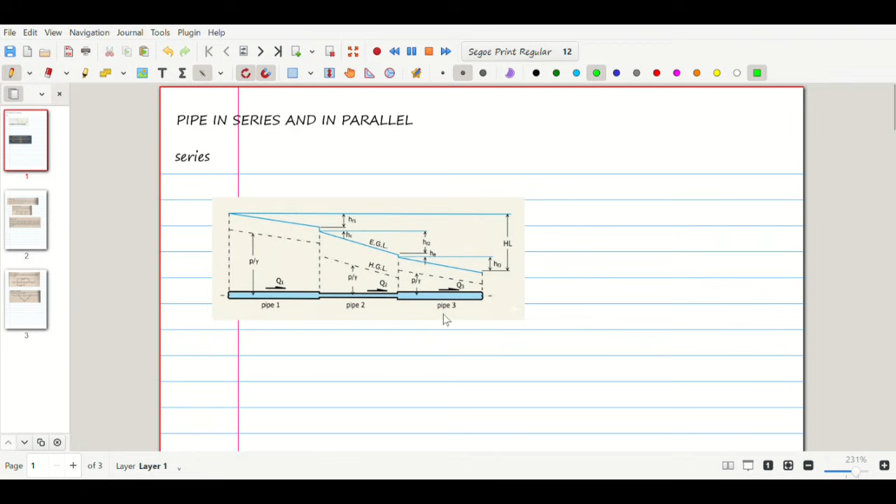What you should notice is, for pipe 1, pipe 2, and pipe 3, is the head loss different? Or is the head loss the same? And also, is the discharge different? Okay, so first notice the discharge.

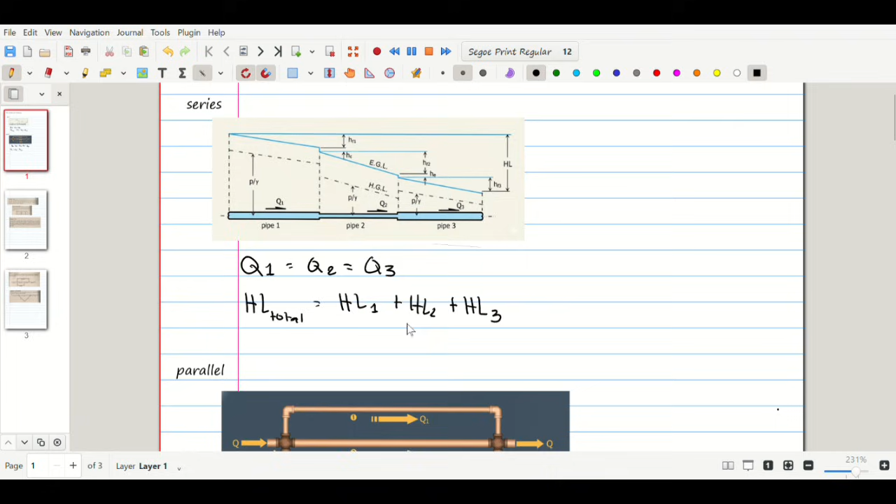So, ang takeaway mo dito, kapag series, the discharge are equal, head loss from starting point papuntang end point is the summation of head losses. Kapag parallel naman, the discharge from A to B is equal. However, yung nasa pipe sa loob, not necessarily equal. And kapag pinagsama mo yon, equal yon sa discharge sa B. And lastly, yung head loss naman, yun naman yung magiging equal.

So, parang baliktad lang yung series and yung pipes in parallel. Okay? So, diniscuss lang natin ngayon yung concepts and we will be continuing with the problems tomorrow. So, ito yan.

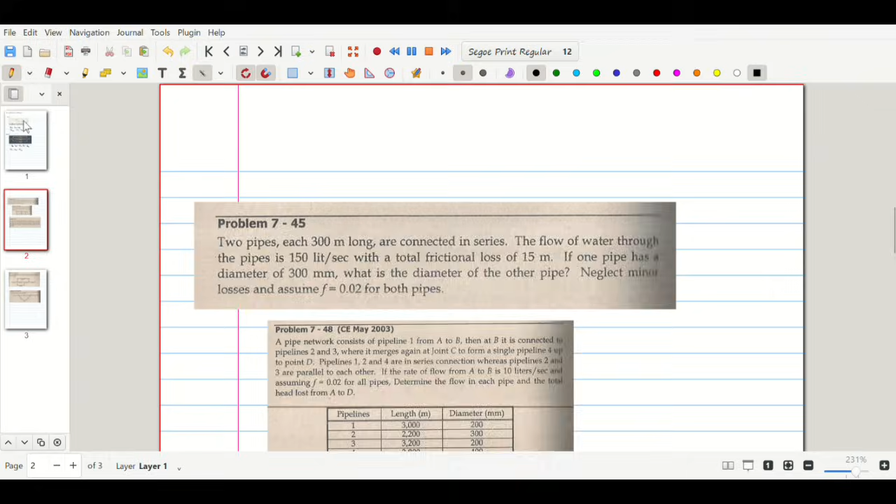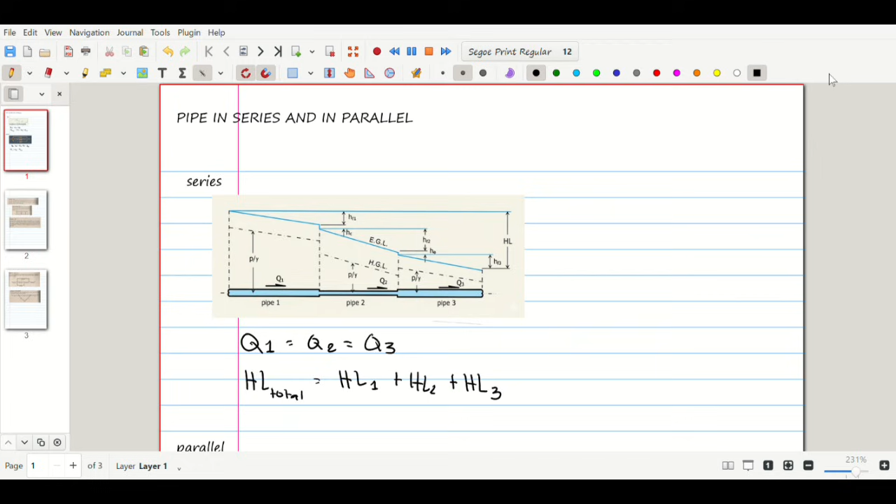Ayan. So, ito na yung mga problems natin. So, let's go. Dito na sa ating first item. We have these two pipes, each 300 meters long and is connected in series. The flow of water through the pipe is 150 liters per second with a total frictional loss of 15 meters. If one pipe has a diameter of 300 millimeters, what is the diameter of the other pipe? So, neglect na natin yung minor losses and assume natin that the friction factor is 0.02 for both pipes.

So, for this one, we have to note na ang binanggit niya din ang ating pipe is connected in series. Okay? So, let's say this is your pipe 1 and then yung pipe 2 nandito, karugtong. And so, pipe 1, pipe 2.

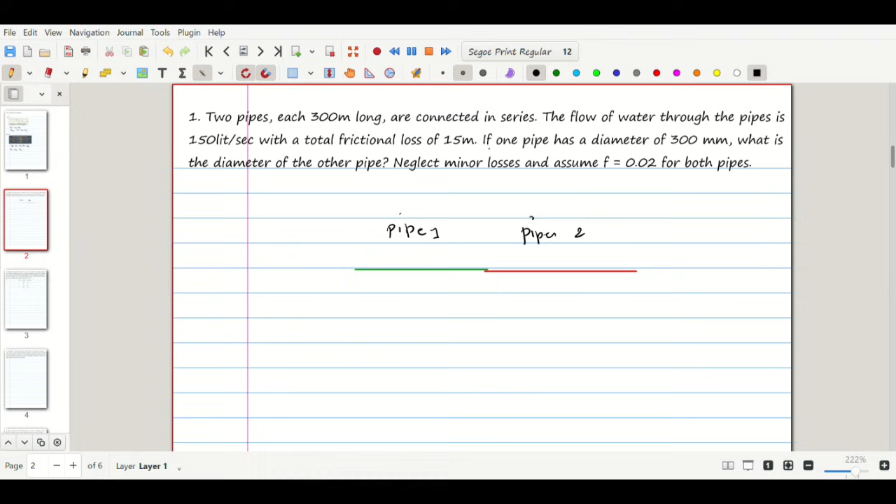For this one, kailangan mong maalala ang characteristics ng pipes kapag sila ay in series, particularly the fluids or energies of the fluids inside. Unang-una, kapag series, ang discharge for both pipes has to be equal. However, the head loss are not the same. But one thing to note, the total head loss from pipe 1 to the end, sa dulo ni pipe 2, ay equal sa head loss doon sa pipe 1 and sa head loss doon sa pipe 2. So the total head loss is equal to the individual head losses doon sa ating pipes.

Given sa atin na yung total head loss or total frictional loss is 15 meters, and given din yung diameter ng isang pipe, yung pipe 1. Ang tinatanong, ano daw yung diameter ng isa pang pipe? Kunin natin: the total frictional loss is 15, ito na yung total head loss natin, so equal siya sa head loss 1, yung isang pipe natin.

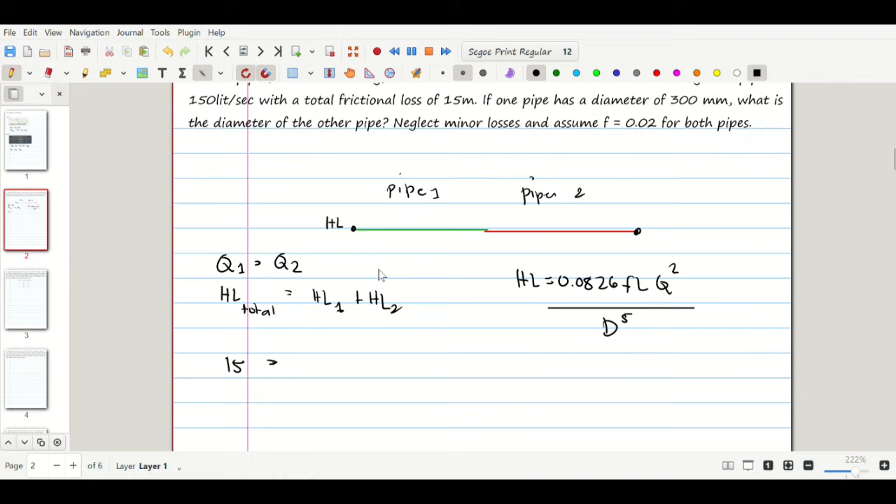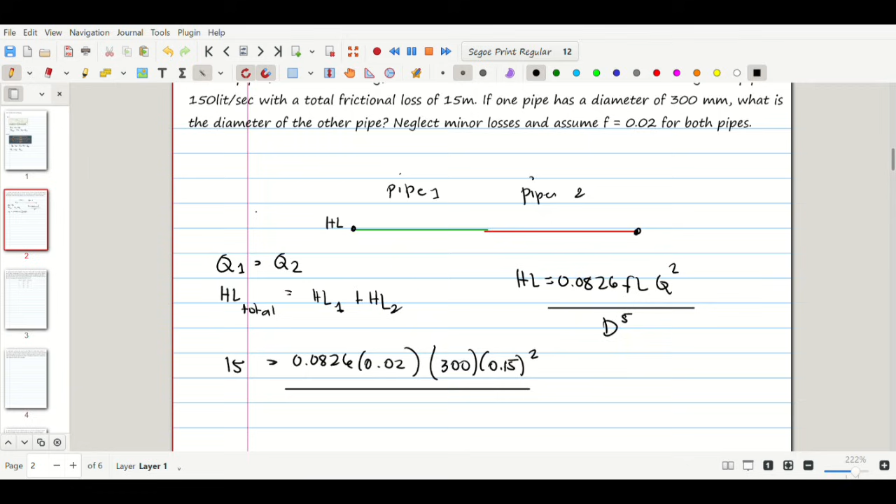Since we will be using Darcy-Weisbach, the head loss formula is 0.0826 FLQ squared over D raised to 5. Ilagay natin dito, 0.0826, F is 0.02 - headloss 1 lang tayo, yung unang pipe. And the length of that pipe is 300 meters, and the discharge is 150 liters - gawin mong cubic meter - squared over diameter is 300 mm, so 0.3 raised to 5.

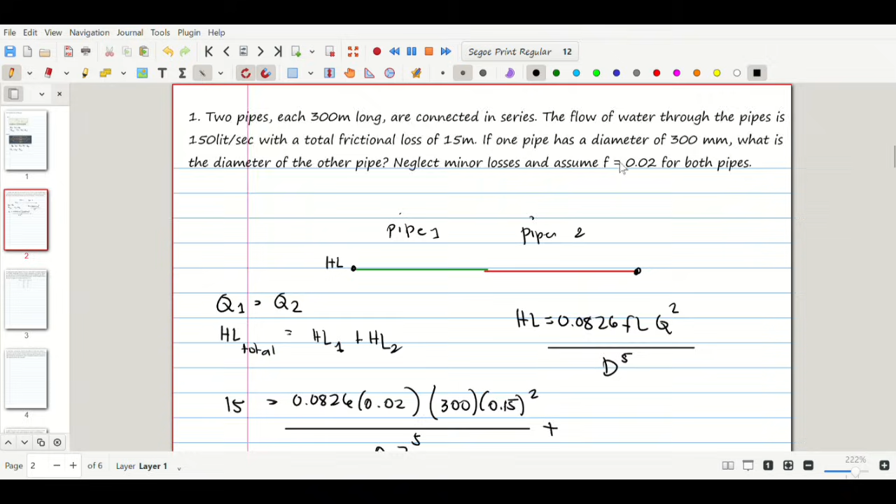At idagdag natin yan sa head loss doon sa pangalawa - same formula except na unknown yung kanyang diameter. Same siya ng length, each is 300 meters, so malamang same din ang discharge - equal discharge, same din ang friction factor. Substitute natin: 0.0826, friction factor is 0.02, length is 300 meters, Q is ganun din, diameter is unknown. So solving for the diameter, this one is equal to...

15 minus 0.0826 times 0.02 times 300... So diameter is 0.2546 meters, or 254.66 millimeters. Okay, that is your final answer.

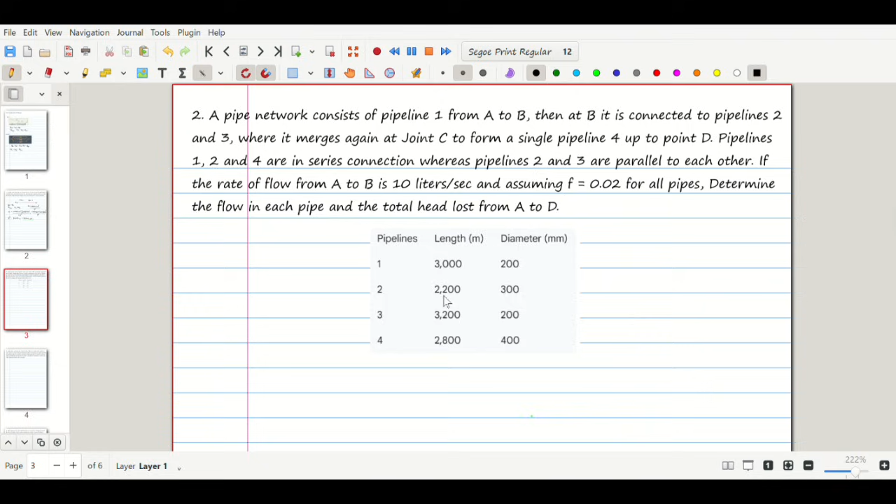Below, nandito yung mga data that are necessary para ma-solve ang problem na to. So to start, try natin i-illustrate kung ano yung nangyayari. We have a pipeline - let's say this is your pipeline from point A to point B.

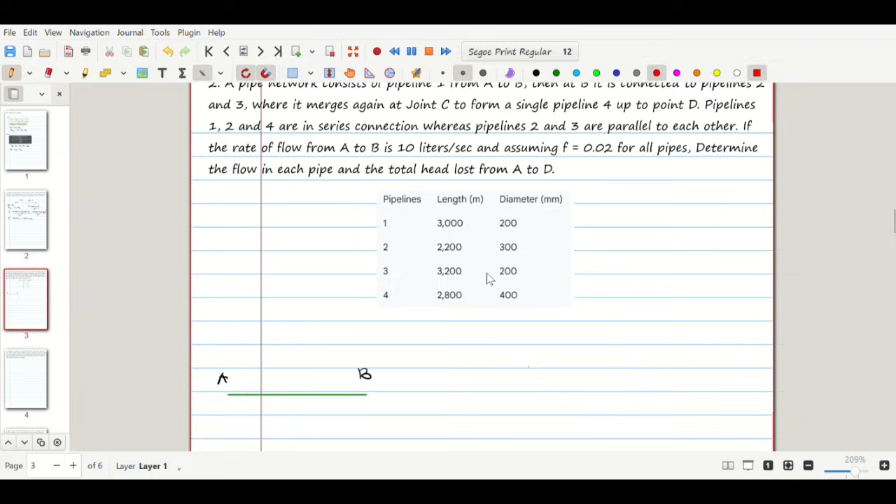Pipeline from point A to point B. At sabi, it is at point B, connected to pipelines 2 and 3. So yung nasa A to B, yun yung pipeline 1 natin. At saka from B, connect tayo ng dalawa - nag-branch siya, and then nag-merge din sa joint C. I-merge natin after mag-branch. Dito siya nag-merge sa joint C - let's call this joint C. And yung pipeline sa taas, let's call this pipe number 2, at yung nasa baba, pipe number 3.

At lastly, pagdating sa joint C, magpo-form na lang siya ng isang single pipe - from C, isang single pipe hanggang makarating sa joint D. Itong huling pipe, that is pipeline 4 according to the problem. So each pipe, 1, 2, 3, and 4, nandito yung mga given data.

Ang gustong ipahanap sa atin, assuming na the rate of flow from A to B is 10 liters per second and the friction factor is 0.02, ano yung discharge, the rate of flow in each pipe, and then yung total head loss. Isolve natin, unahin natin yung discharge. Pero before we start, identify muna natin yung mga major consideration and assumption na dapat alam natin before we solve.

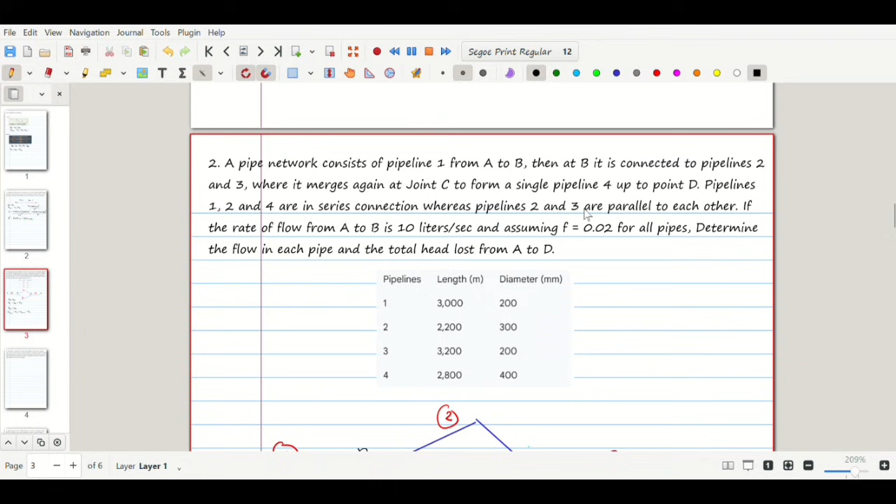So with that, let's recognize that our discharge is 10 liters. If it's in cubic meters, we just divide by 1,000 based on the conversion from cubic meter to liter. And our friction factor is 0.02. Knowing that it's F, we know we'll use the Darcy-Weisbach formula for head loss.

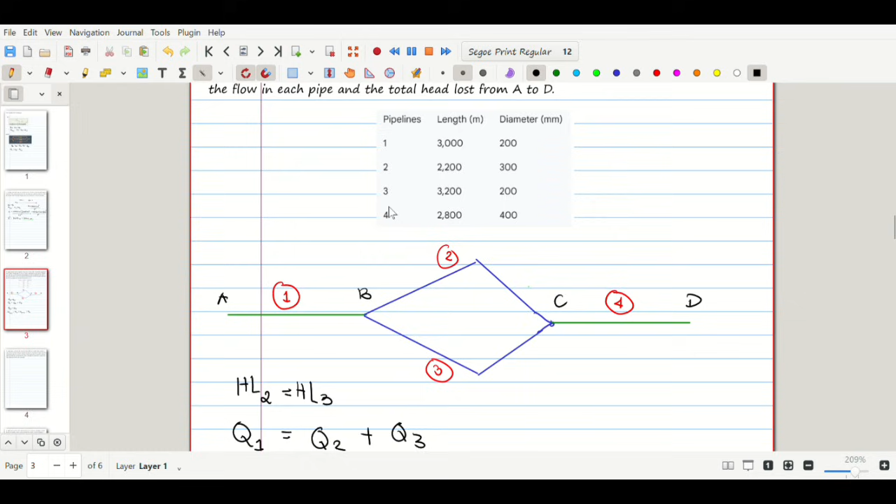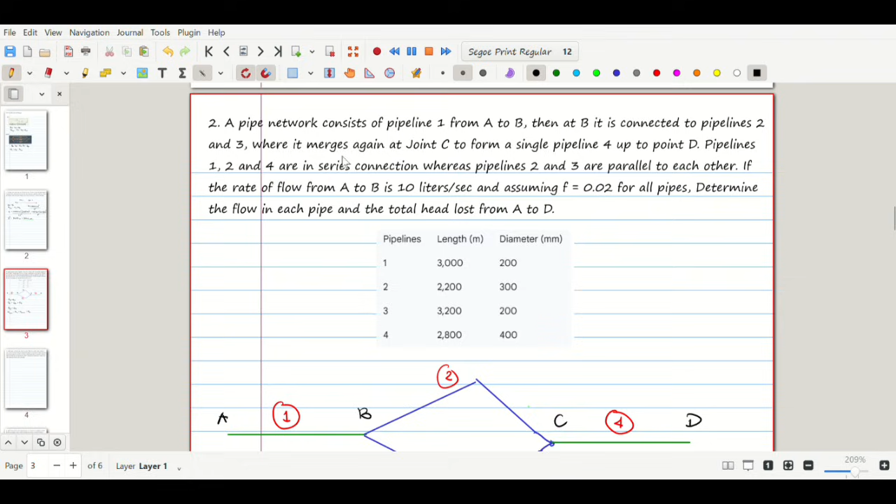So with that being said, let's solve for the flows or discharge in each pipeline. Let's start with the discharge at pipeline 4. Why? Because we already know the discharge at pipe 1. It says there: the rate of flow from A to B.

So where is A to B? This is it, A to B, pipe 1. So the discharge at pipe 1 is equal to 0.01 cubic meter per second.

And we saw that it is equal to the discharge at pipeline 4. So we can see as well that the discharge at pipe 4 is also 0.01 cubic meter per second, or 10 liters per second. So we already have one value.

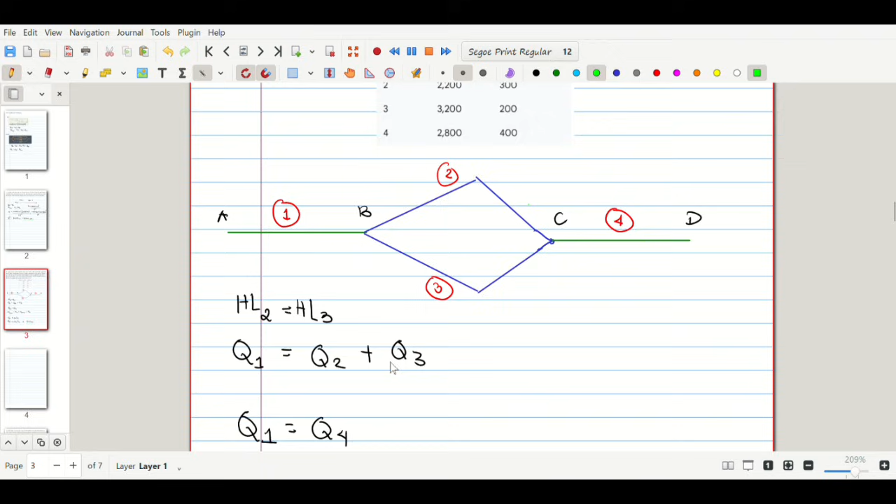So next, let's try to find the discharge at point 2 and at point 3. How do we solve that? Well, we can get that because we know that the discharge from point 2 and point 3, combined, equals 0.01, the discharge of pipe 1. We'll get both of these by first solving their head loss, since the head loss at 2 and at 3 are equal.

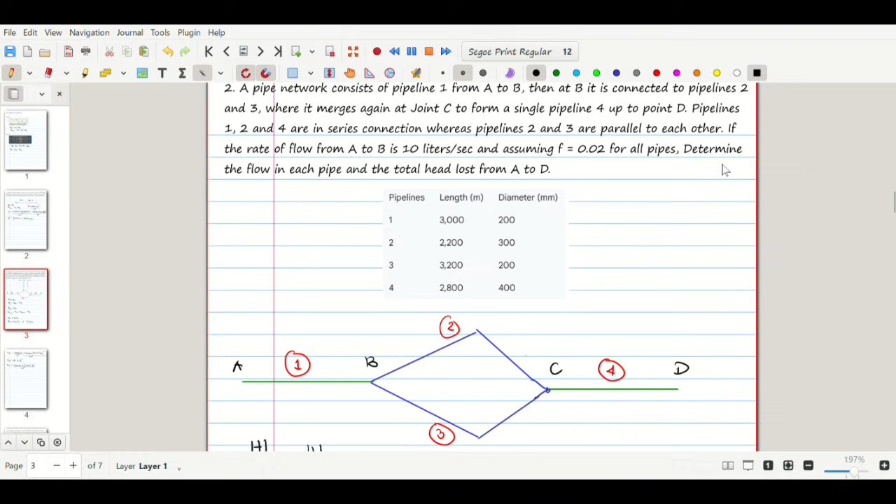So let's do the same for head loss number 3, or sa head loss ng pipeline 3. Diretso na tayo, 0.0826. F is 0.02. Check natin yung length and diameter based on the provided data. Yung length ni pipeline 3 is 3,200 at 200 diameter in mm. So 3,200 meters, Q sub 3 squared over 0.2 raised to 5. Ayan, tama.

So ganun ulit, kunin natin yung equivalent value nung mga numbers na to. 3,200 divided by 0.2 raised to 5, so this is equal to 16,520 Q sub 3 squared. So this is the head loss 3. Okay, so why is this necessary?

Ang dahilan ay para makuha natin kung ano ba yung relationship between the discharge 2 and discharge 3, knowing that the head loss at pipeline 2 is equivalent to the head loss at pipeline 3. So pwede natin kunin ang relationship sa dalawang discharge na yan. Lagay natin: 1495.64 Q sub 2 squared equal siya kay 16,520 Q sub 3 squared.

So i-isolate natin, ikaw ang bahala kung sino ang gusto mong i-isolate. So for this example, isolate natin si Q sub 3. Okay, so Q sub 3 squared is equal to 1495.64 Q sub 2 squared.

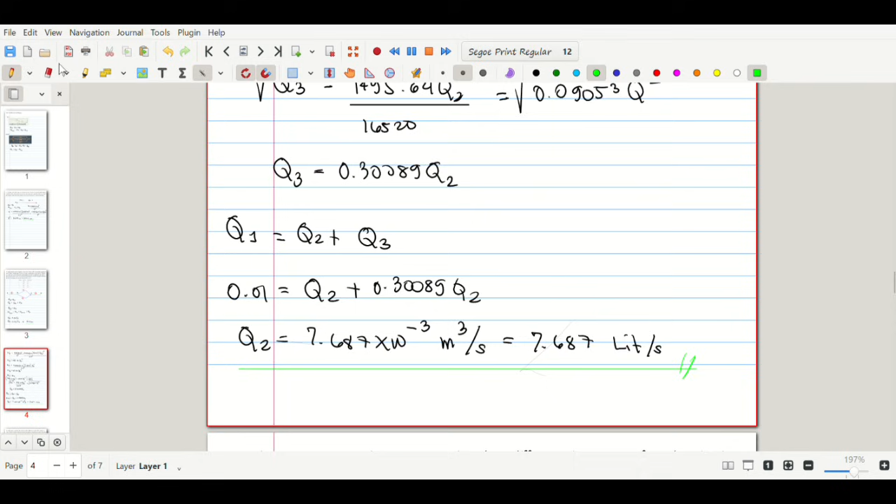Yan ay para lamang sa discharge 2. So nakuha na natin yung sagot o the discharge sa pipeline 4, meron na din sa discharge sa pipeline 2. Kaya mo na din kunin yung discharge sa pipeline 3.

Diba? So yung Q3, diretso natin, ha. Q3 is equal to 0.30089 Q sub 2, so equal yan sa 2.312957 times 10 raised to negative 3 cubic meters per second. Siyempre, naka-liters ang gusto natin, times 1,000, 2.31296 liters per second. And that is your answer for the discharge at the pipeline 3.

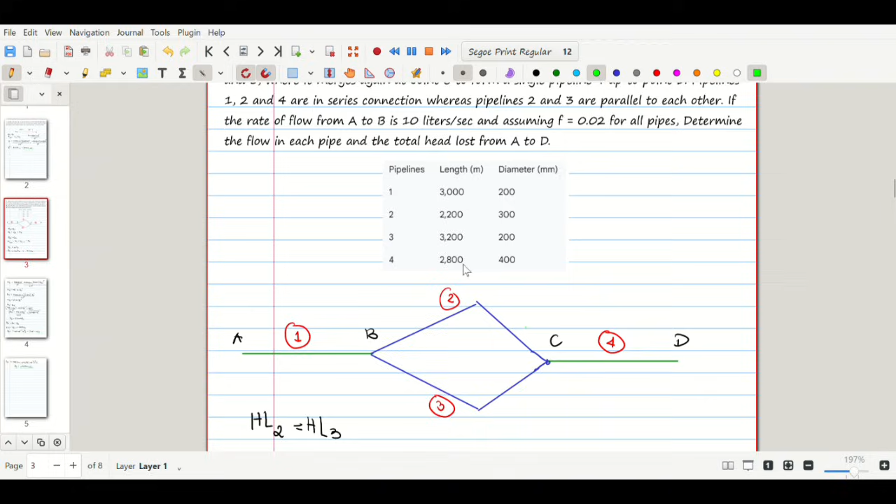So may sagot na tayong lahat sa mga discharge, di ba? Q3, Q2, Q1, and Q4. Ngayon, ang kasunod, what is the total head loss from A to D? Alam mo na yun kung paano solve. So the total head loss is equal to the head loss from A to B, or head loss ng pipe 1, head loss ng pipe 2, and yung head loss sa pipe 3.

So using the formulas na meron tayo, kunin na natin isa-isa. 0.0826, F 0.02. Ang length ni point 1 ay 3,000, diba? 3,000, and then the diameter is 200... 3,200, and then 200 mm, so 0.2, and then the discharge is 0.01 squared.

So kunin na natin 0.0826, 0.02, 3,000, 0.1 squared, 0.01 squared, over 0.2 raised to 5.

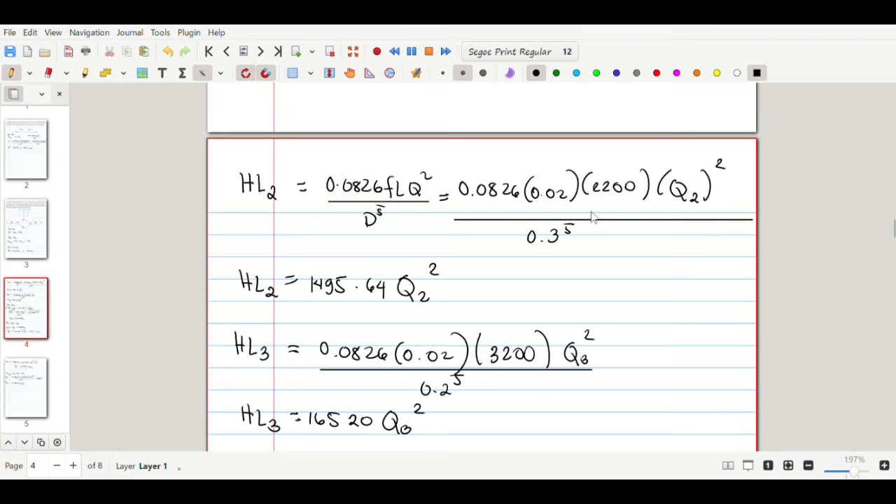1.54875. Okay, next, head loss sa point 2. Pwedeng head loss sa point 2, pwedeng head loss sa point 3. Palitan ko to, hindi pala to point 3, this is point 4. So pwedeng head loss sa point 2, pwedeng head loss sa point 3 - equal naman yon. So head loss sa point 2 na lang: 0.0826, 0.02, times the length ng pipe 2, nakuha na natin kanina, 2,200, and then the diameter is 0.3 raised to 5, and then yung Q niya ay nakuha mo na din, 7.687.

7.687 times 10 raised to negative 3, squared. So the head loss is... wait lang, 0.0826 times 0.02 times 2,200 over... 0.088378 meters. Okay, ito naman ang head loss sa point 2 or pipeline 2.

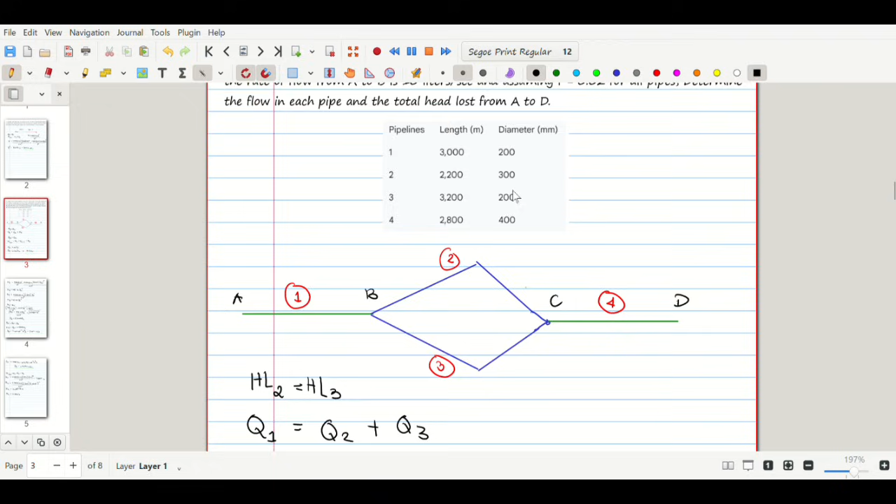Last, punta tayo sa head loss sa point 4. Head loss sa point 4 is equal to 0.0826 F. Length is, kalimutan natin, 2,800. Diameter is 400 mm, 2,800. Discharge is the same at point 1 or pipe 1, so 0.01 squared over 0.4 raised to 5.

So head loss sa point 4: 0.02 times 2,800 times 0.01 squared over 0.4 raised to 5. So 0.04517. Ayan.

Pwede mo nang ipag-total yung head losses natin, yung tatlong to. So the total head loss from A to D is equal to yung sa 1, 1.55 plus 0.088 plus 0.045. This is equal to 1.68 meters. Okay, and yun na yung final answer.

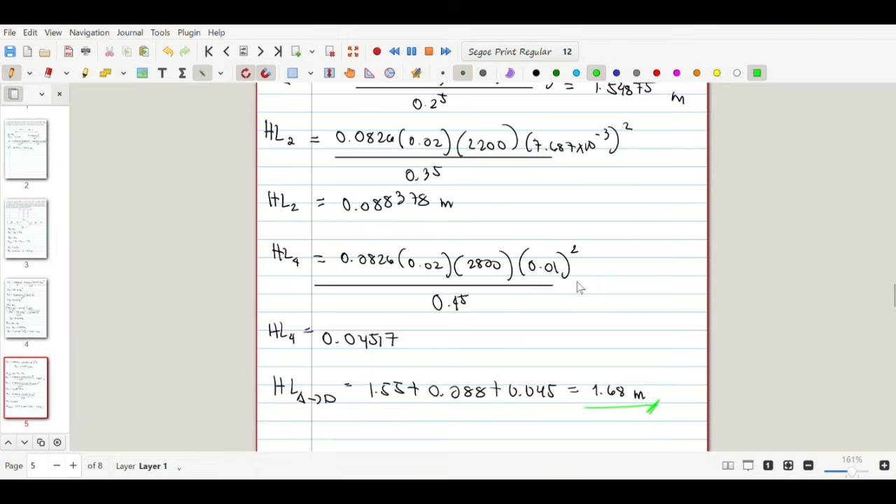So pag ganito, sa series and parallel problems, you have to first identify talaga yung mga assumptions. Ano ba yung mga equal head losses? Ano ba yung mga discharges or discharge na equal? Ano yung mga head loss or discharge na pag pinag-add, ito yung magiging value. So yung mga nakuha mo, itong ginawa natin, yung apat na to, as you can see, nagamit natin lahat yan.

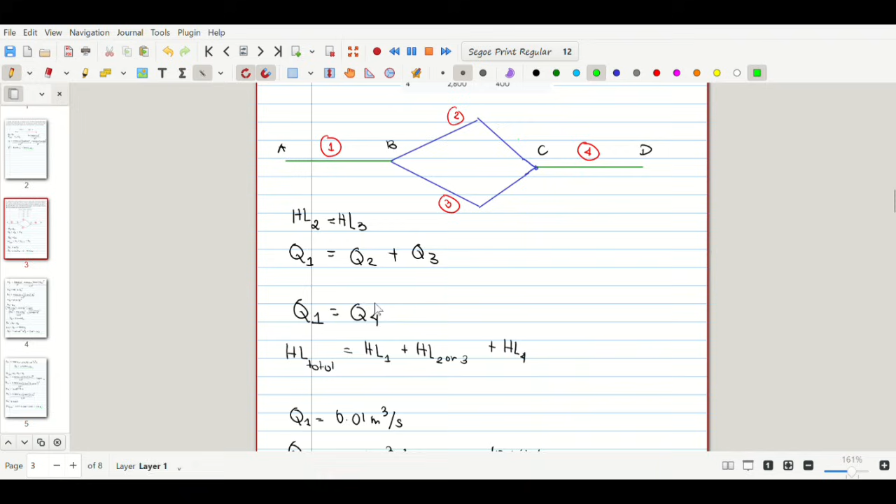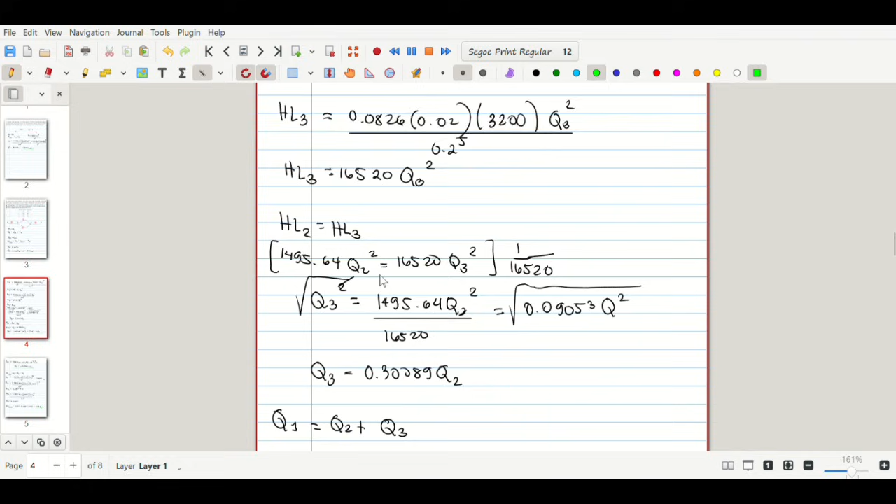So you have first to identify that. Usually naman, madali naman yung hanapin sa problem. Tulad dito, halos binanggit naman na lahat. So you have to write it down na lang para hindi mo makalimutan. And from these equations, nabuo natin yung mga relationships between the variables, and then apply yung mga formulas na alam natin related sa head loss. So ayan, makukuha din natin yung mga pinapahanap. Okay, so that's it.

Okay, so let's go with this next item. So meron tayong pipe system connecting two reservoirs whose difference in water surface elevation is 13 meters. Consists of 320 meters of 600 mm diameter pipe, which is pipe 1. And it will branch into 640 meters of 300 millimeters diameter pipe, which is pipe 2. And then pipe 3 naman ay 640 meters of 450 mm na pipe.

So yung pipe 1 and pipe 2 ay nasa series. And then since mag-branch siya into pipe 2 and pipe 3, yung dalawang pipe na yon, sila naman ay nakaparallel. And then later on, mag-join siya sa panghuling pipe, this is pipe 4, I believe. Pipe 4, which is a 600 mm diameter line, which is 2,300 meters long. Assuming F is 0.032 for all pipes, determine the flow rate in each pipe.

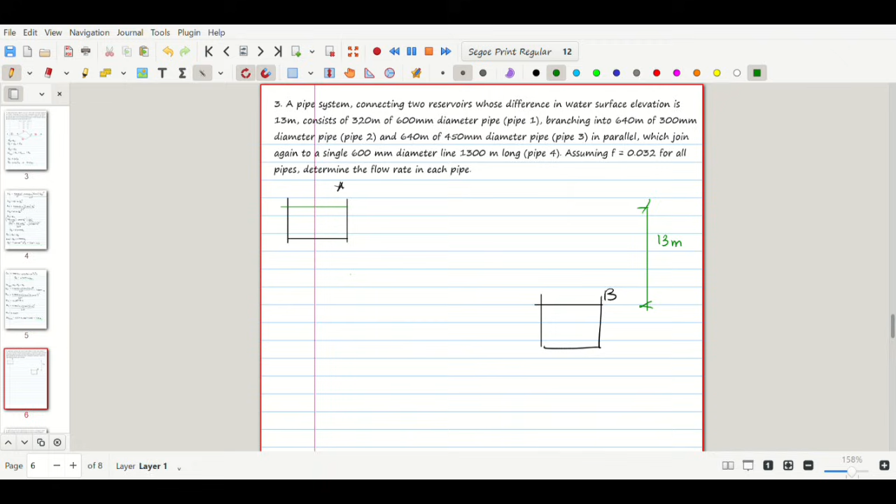So yung problem na to, parang similar sa previous problem. So paano? Malalaman natin by first drawing, illustrating the problem. Lagay natin yung meron tayong reservoir - okay, this is your reservoir A, let's say. And then sa baba niya, downstream, ito naman si reservoir B. At nabanggit dyan na yung elevation ng surface ng liquid, the difference in elevation is 13 meters.

So from pipe or from reservoir A, merong pipe 1. At saka, magbabranch siya into 2 pipes. And then later on, magko-connect sa isang pipe bago siya makarating sa reservoir B. So let's say itong nauna, ito yung pipe 1. This is your pipe 2, this is pipe 3, and last, that is your pipe 4.

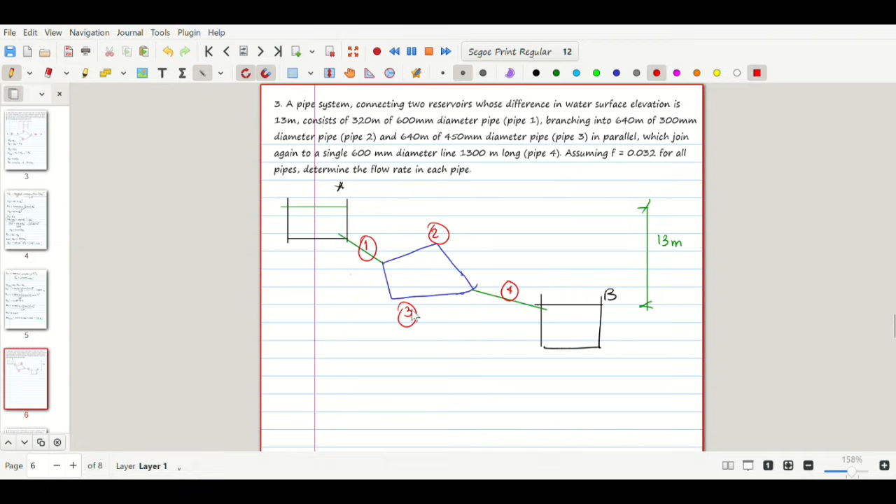Kompleto naman na halos yung mga data dyan kasi, meron tayong friction factor, may diameters, at may lengths naman na given. So with that known to us, at knowing na nailagay naman na natin na parallel yung 2 and 3, then the rest is in series. Parang kamukha nga to ng previous problem. So let's check o determine the assumption or general consideration for this problem. With pipes 2 and 3 in parallel, alam natin na yung head loss sa point 2 equal sa head loss sa point 3. At with that being said, we can say na yung discharge sa point 1 is equal to the sum of the discharge from pipeline 2 and pipeline 3.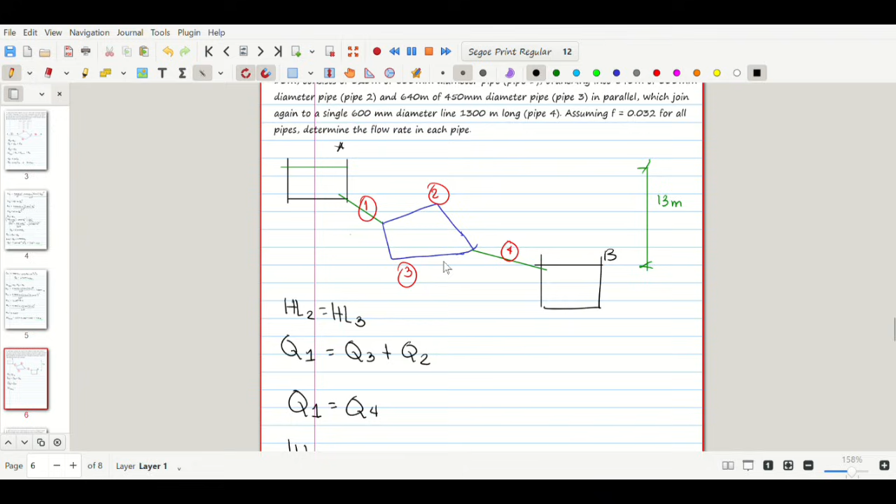Mahahati yung liquid dyan, tapos babalik doon. Because of that, the discharge on pipe 1 is equal to the discharge sa pipeline 4. And lastly, the head loss or the total head loss mula sa reservoir A papuntang reservoir B is the sum of the individual head losses from 1, 2, and 4 or 1, 3, and 4. So yung head loss from A to B, yung total, ito na yung head loss sa lahat ng pipe in series na madadaanan niya. So that is the head loss at pipe 1 plus head loss at pipe 2 or pipe 3, equal naman yun, and head loss sa pipe 4.

So here, ito na yung mga bagay na i-consider natin as we solve this problem. So, continuing.

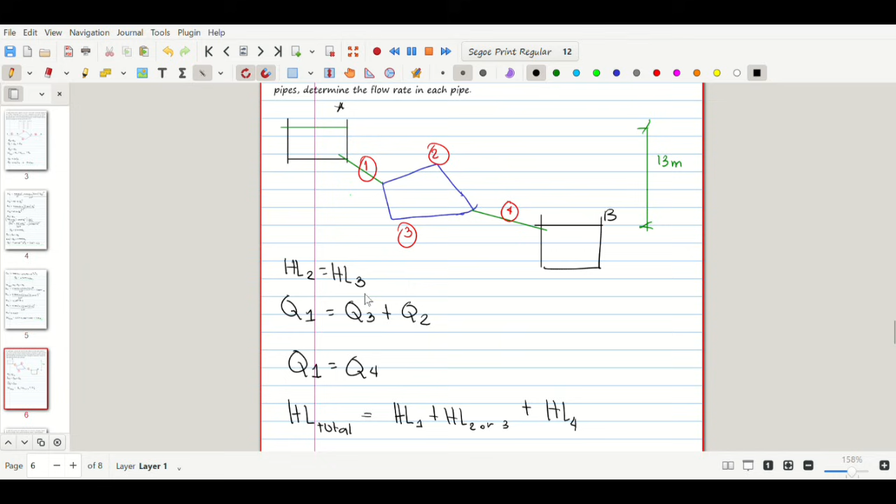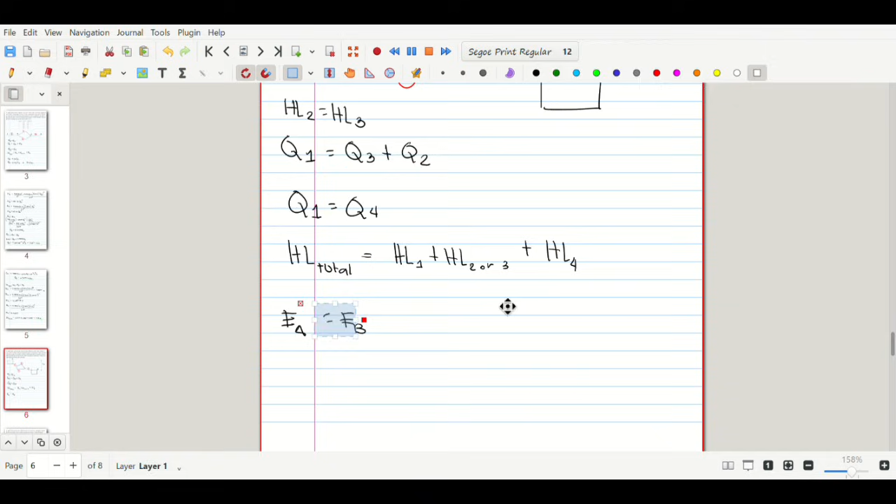Alam natin, kaya mong isolve agad-agad yung total head loss, kasi alam natin na meron dalawang reservoir and given yung difference in elevation between those two. So by using the energy theorem, wherein the energy at point A is equal to the energy at point B, kung walang head loss, pero dahil may head loss yan, alam natin na before tayo makarating sa point B, mabawasan natin ang total head loss. So lahat ng head loss from A to B kaya nang kunin, diba? Kasi reservoir to, the pressure head, 0. The velocity, 0.

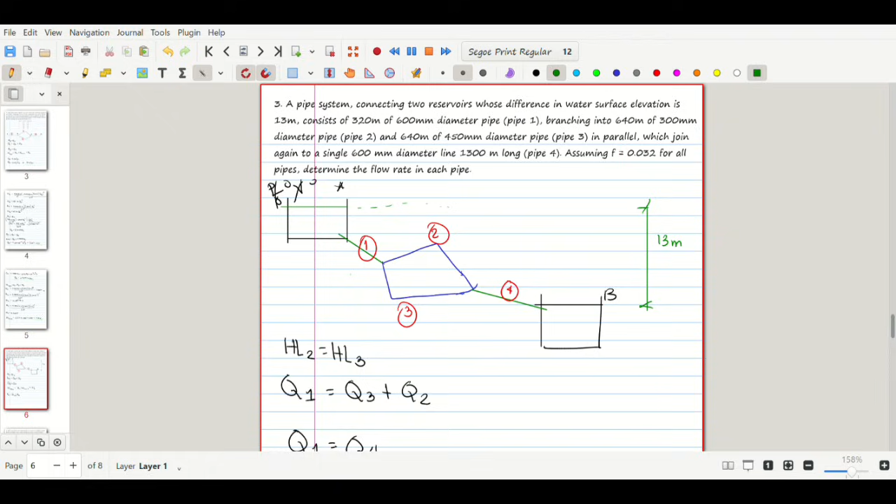By setting the reference at point A, let's say ito yung elevation 0 natin, so therefore we can say the energy at point A is 0 kasi 0 lahat ang pressure, ang velocity, at yung elevation head. So bawasan natin yan ng total head loss, equal naman siya sa elevation head ni B, which is negative 13 kasi nasa baba siya. So, reservoir din to, wala din yung pressure, wala din yung velocity. So we can say na yung total head loss is equal to 13 meters. Meron na agad tayong total head loss.

So with that, we can continue by solving naman for head loss sa 1, sa 2 or 3, and yung head loss sa pipe 4. Note natin na wala pa tayong discharge. Okay lang. Yung part na to, yung Q1, Q2, Q3, wala pa tayong mailalagay dyan kasi wala pa naman talaga tayong discharge. So punta ulit tayo sa head loss dahil may mga data na tayo doon.

So, head loss muna tayo sa pipe 1: 0.0826 FL Q squared over D raised to 5. 0.0826, yung F natin is 0.032 for all pipes. Ang length ni pipe 1, sabi doon, 320 meters. So lagyan natin, and then Q1 squared over the diameter of pipe 1, 600 millimeters, so 0.6 is to 5.

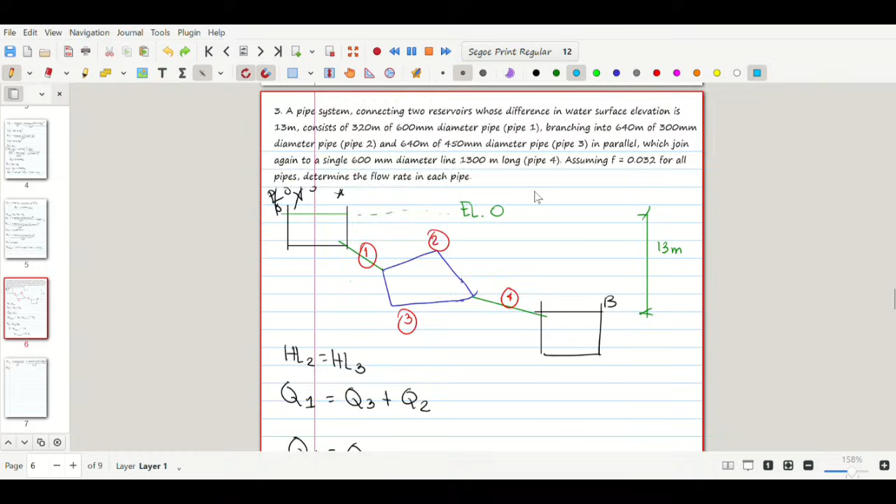So the head loss at point 1 is equal to, ganun ulit, tulad ng ginawa natin kanina, kunin natin yung equivalent numerical value ng lahat ng mga data na to, iwan lang natin yung Q. So 0.0826, 0.032, 320 over 0.6 raised to 5. Double check ko lang yung 320, yes. Bakit ba necessary? Actually, hindi naman siya required. Ang purpose kasi natin, para hindi siya mahirap i-type, o kumbaga, pasimplihin, kasi pag nilagay mo yung sa calculator ng dire-diretso, marami diba. So sinimplify lang natin, purpose din for simplification. Hindi siya required in essence, pero mapapadali niya yung pagsisolve natin. So this is 10.877 Q1 squared.

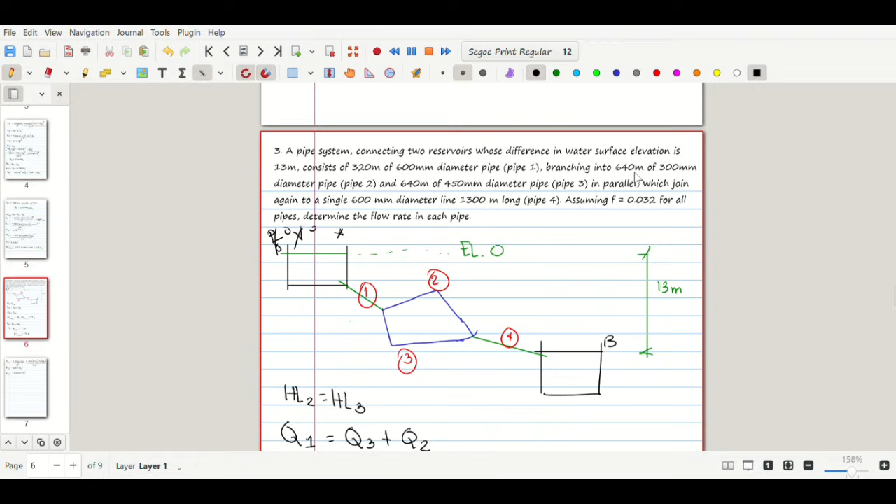Yan, so hayaan muna natin kasi wala pa tayong masasolve dyan. Punta tayo sa head loss sa pipe 2. So, head loss sa pipe 2, ganun ulit, 0.0826 F. Ang length naman ni pipe 2, it is 640 meters and 300 mm diameter. So 640 and then Q sub 2 squared over 300 mm, so 0.3 raised to 5.

So this is equal to 0.0826, 0.032, 640 over 0.3 raised to 5. So, 696.15 Q sub 2 squared. Hayaan din natin yan.

Punta tayo sa head loss sa pipe 3. So this is equal to 0.0826, 0.032. Ang length naman ni 3 is 640 meters and 450 millimeters. So 640 Q sub 3 squared and then 0.45 raised to 5. Tama ba? Sige, yes. So ito naman ay equal sa 91.67 Q sub 3 squared.

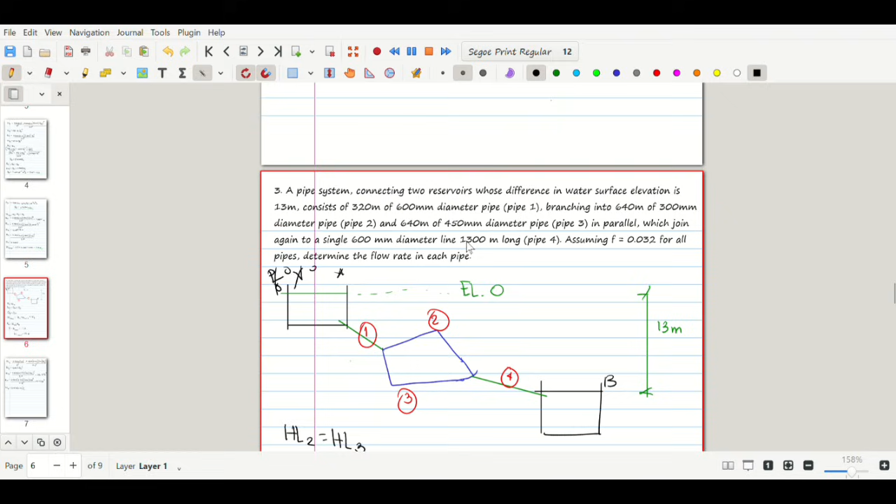And last is the head loss for point 4 or pipeline 4. So, 0.0826, 0.032. Ang F natin ay 0.032. Ang length is 1,300. Diameter is 600. So, 1,300 Q sub 4 squared over 600 mm, so 0.6 raised to 5. So that is equal to 0.0826 times 0.032 times 1,300 over 0.6 raised to 5. And so, 44.189 Q4 squared. Ayan, so kompleto na.

Kompleto na yung individual head losses natin in terms of Q. So at this point, tingnan naman natin yung relationship between these head losses.

Alam natin na yung head loss 2 equal siya kay head loss 3. Diba, parallel kasi sila. So ibig sabihin, parehas ng head loss. And yung tatlo, yung 1, 2, and 4, o yung 1, 3, and 4, yan naman ay in series, meaning yung total nitong tatlong yon equal naman yun sa total head loss, which is 13 meters.

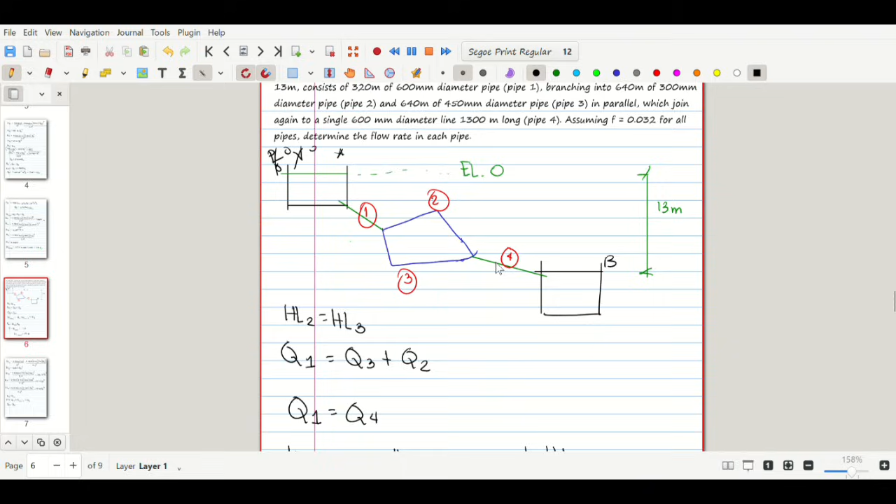Also, ito pa. Alam natin na yung discharge at pipe 1 equals sa discharge at pipe 4. Tama, kasi sila ay 1 and 4, they are in series. So pagdating mo dito, paglabas ng tubig dyan, mahahati sa 2 and 3. Pagbalik dito sa 4, equal na sila.

So importante yan. Ilagay natin yung mga values na meron tayo, at makikita natin kung paano maa-apply yung mga equation na to. So let's start with the discharge.

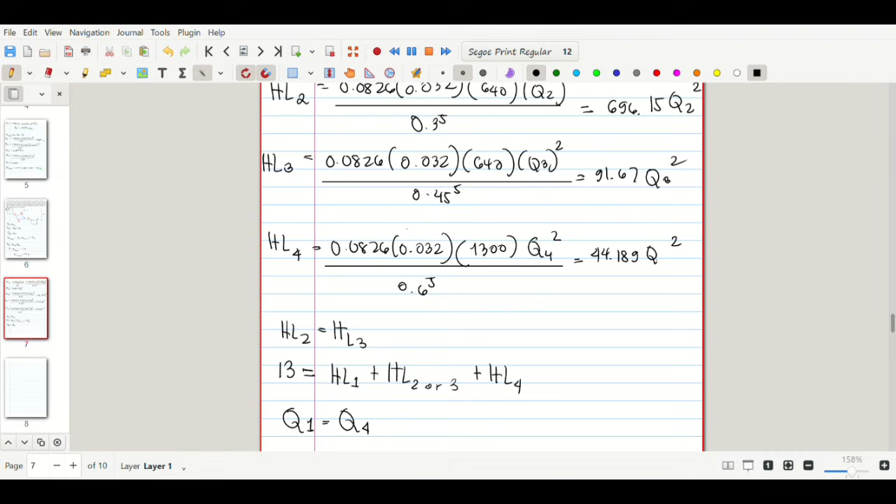Knowing na yung discharge sa 1, Q1, equal naman siya sa discharge sa 4, Q4, pwede natin sabihin na instead of Q4, wag na nating ilagay na Q4 kasi equal naman siya kay Q1. So lagay mo na Q1. Ikaw bahala kung gusto mong Q4, di Q4 to, Q4 din yung nasa taas. Diba, equal naman sila.

Okay, so ilagay natin. So 13 is equal to... ito tayo. Yan, head loss 1. Ang head loss 1 is 10.877 Q1 squared. And...

Then add natin yung head loss 2 or head loss 3. Kahit saan lang dyan. Let's say si head loss 2 na lang. Okay, si head loss 2, wag muna natin lagyan ng number. Plus yung head loss 4, which is 44.189 Q sub 1 squared.

So with this equation, you will notice na si Q1 is the unknown, and also yung HL sub 2. At yung HL sub 2, alam natin na siya ay naka-discharge 2. Kumbaga, yun ang gamit nating variable. So somehow, kahit ilagay natin yung value na to doon sa equation na to, by algebra, alam natin na hindi masasolve yan, kasi dalawa ang unknown. So for this situation, kailangan mong hanapin ang relationship ni discharge 2 with discharge 1. And of course, meron yan.

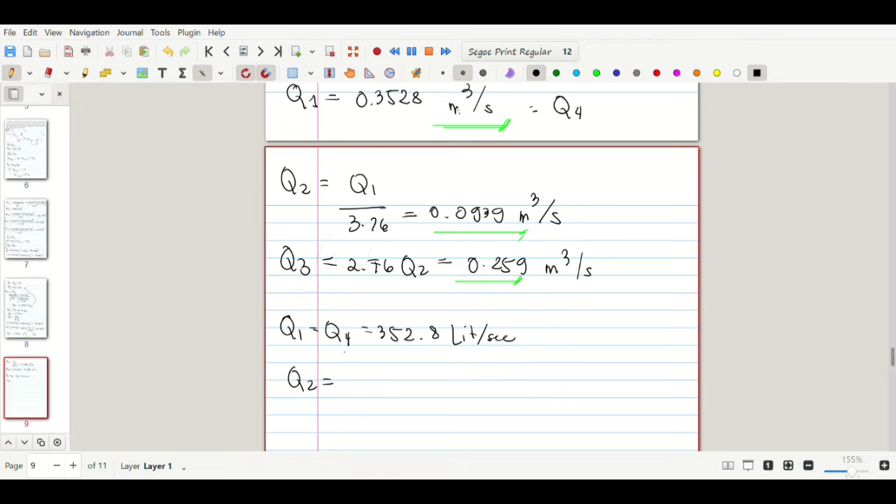So, this is your answer for Q sub 2 and Q sub 3. Lahat yan ilista natin para naka-liters. Q sub 1 is equal to Q sub 4, in liters is 352.8 liters per second. Q sub 2 is equal to 93.9 liters per second. And Q sub 3 is equal to 259 liters per second. Yan na yung final answer.

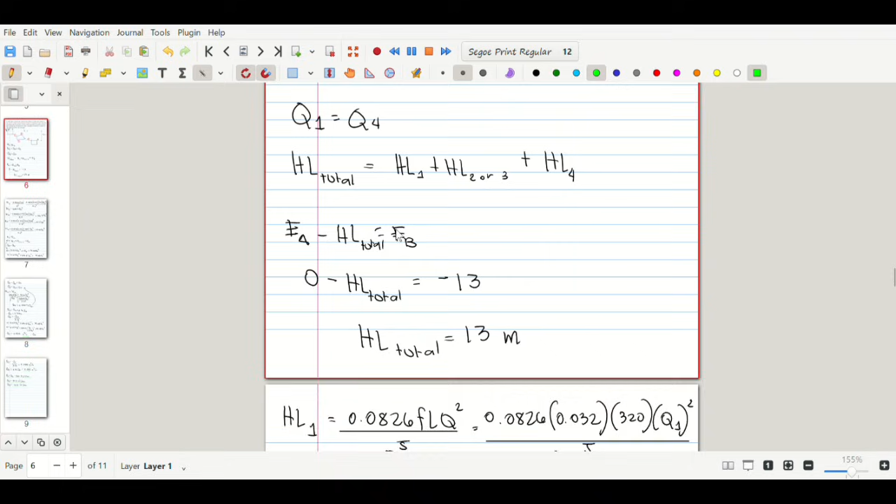So, ultimately, ang gagawin mo dito is need mong hanapin yung relationships, itong mga relationships na yan, this one. So, primarily, kailangan mo munang kunan yung mga head losses given kapag ang hinahanap talaga is discharge.

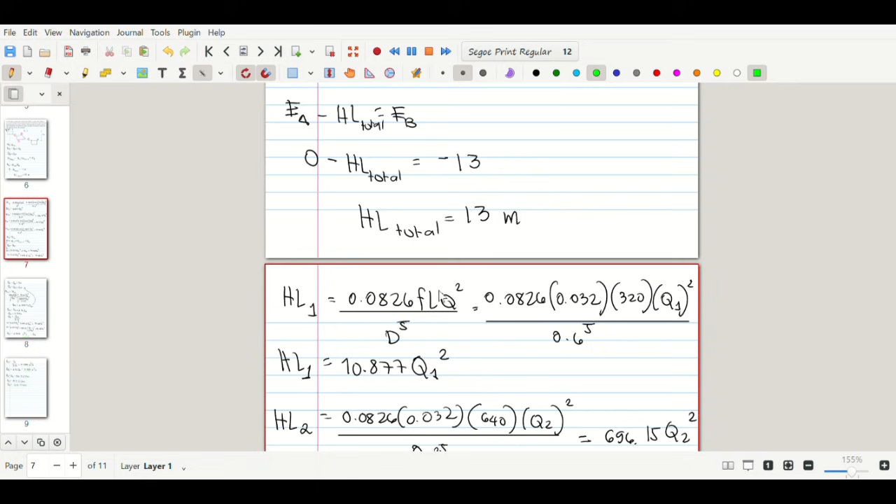So, ano naman ang discharge? Huli nating isa-solve yan. So, for now, kapag walang discharge, ang kailangan mong gawin is to set all variables, lahat ng unknowns, nakaset sila sa isang discharge lamang. Sa case natin, ang pinili natin si discharge 1. Nasa sa inyo yan, pero syempre kanya-kanyang preference, pero discharge 1 based on practice, so pwede nyo rin gawin yan.

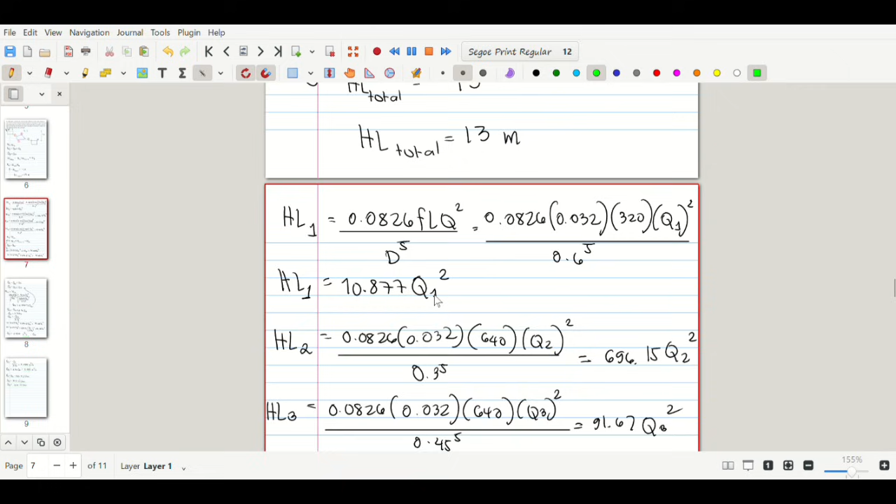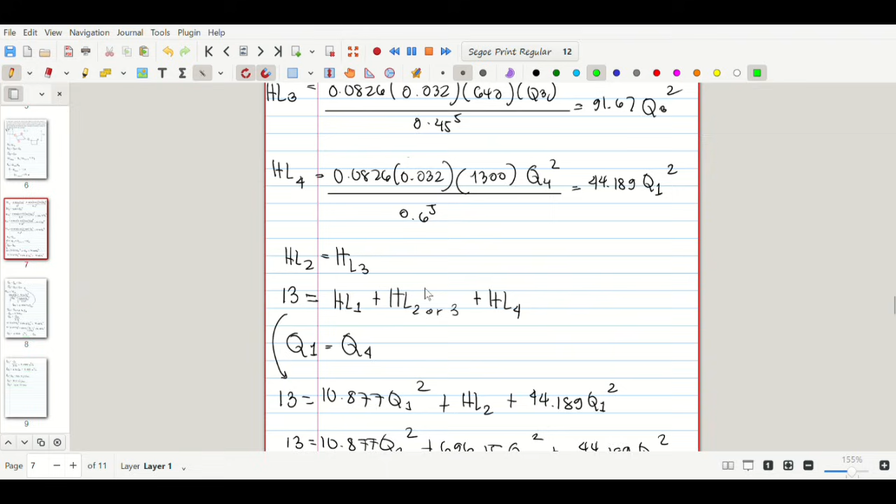Mabilis naman, diba? Isa-isahin mo lahat ng head losses, at hanapin mo rin isa-isa ano ba ang relationships between those variables sa mga head loss natin. Yung basis mo lang naman para sa magiging relationships nila is whether they are in series or in parallel. Okay, so with that, this is your problem number 3.